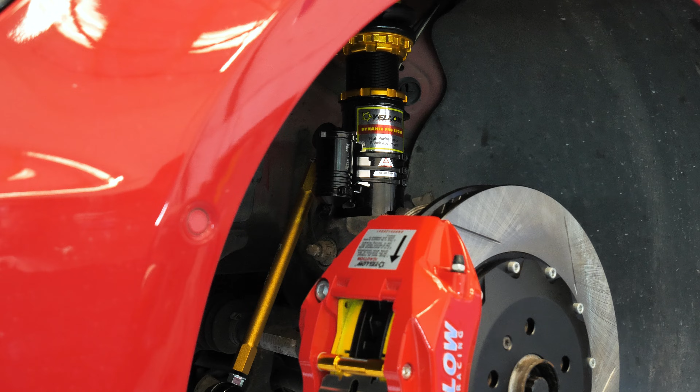Brake kit, RS29s, which we went through in the workshop. We've got the Seat Sport studs, the same studs that we run on the TCR car. Yellow Speed DPS with the Yellow Speed drop links. We've got some KW damper deletes because this car had electronic dampers. You have to fit these, otherwise the traction doesn't work. So they're just to fool the car into thinking that it's still got them on, so the traction control still works.

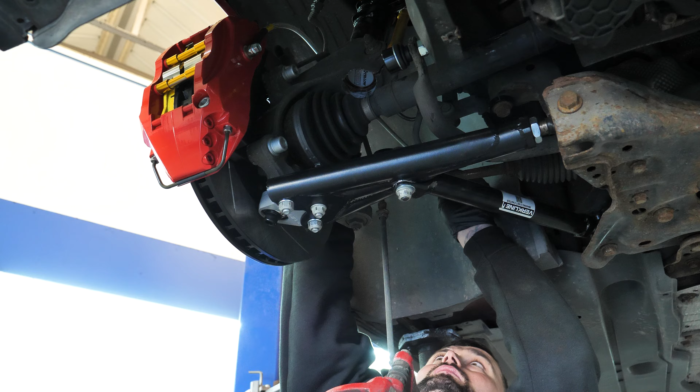Underneath, we've got the RacingLine arms. So set relatively the same as the standard lower arm. Difference in roll centre because this is thicker, which is much better for a lowered car. Otherwise your arms are kind of pointing upwards when you lower it already, which is detrimental to the handling. It's not great at all. So big improvement, mainly with the roll centre at the moment because we've got the arms in the standard location.

Aside from that, we've got the HEL braided lines on. We have got a dog bone insert from Area Motorsport, which just ensures the engine mounts don't try and make a bid for freedom on track. And then we've increased the idle RPM just to get rid of the vibration at idle, so it feels like a stock car still on the road, no vibration or horrible noises from that. Moving on to the rear, I think that's everything on the front.

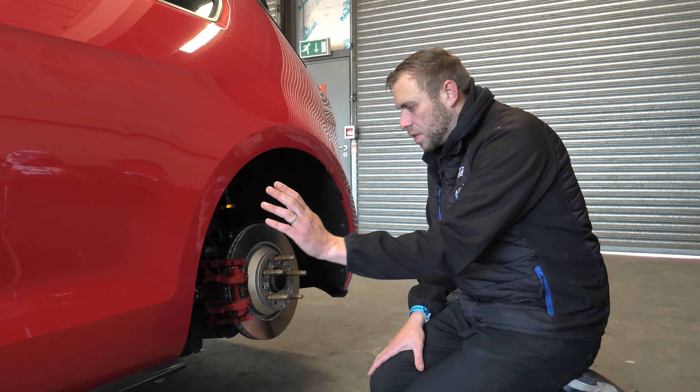Rear, we've got obviously brake pads, the EBC Orange that we spoke about before, the Hardrace camber arms, damper deletes again have to go on the rear to fool the traction into not thinking it's got a problem like a faulty damper or something along those lines. We've got the Powerflex inner and outer bushes on the hub and on the inner spring arm. And then we've got some Hardrace bushes on the trailing arm, which again we didn't go through in the workshop, but there's a lot of flex in those. They're a large bush, very soft, lots of movement under compression and load, so we've changed those to ensure there's no abnormal movement which will change the geometry on the track.

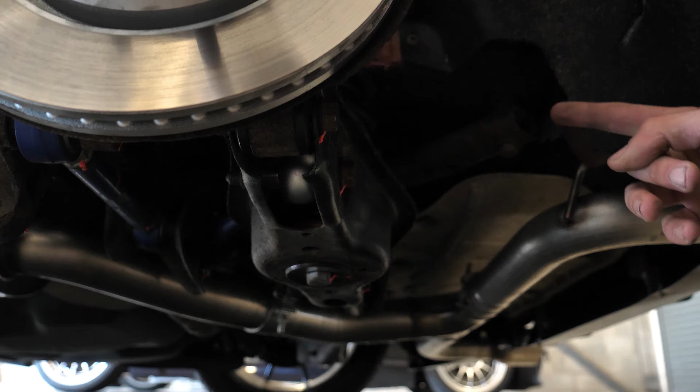If you come around the back, you can probably see again something we didn't have at the workshop, I don't think. It's quite difficult to see, but we've got the Hardrace rear anti-roll bar on there, and then the Whiteline adjustable drop links. So we dropped that on the scales at the workshop. Obviously roll bar's disconnected. Check the corner weights. It's pretty good straight out of the box with the platform heights level. Car weighed, it's got full interior apart from the seats, and weighed about 1340 kg with a full tank of fuel. Our race cars are about 1250, so it's not too bad considering it's an unmolested car that's just got some bucket seats changed and that's it.

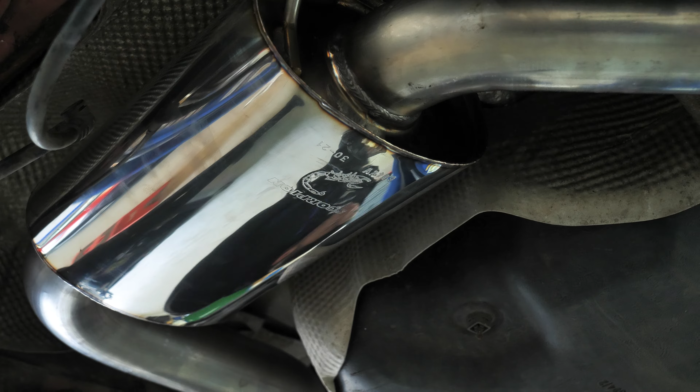A few other things, we've got the Scorpion exhaust on now. Again, resonated system, perfect for 98 decibel track days like today. So no issues with noise at all. And then we've done a few aesthetic things. We've got a Rieger diffuser, Clubsport spoiler. We've got the SRS Tec front bumper scoops and a TRC front lip, but they're really just cosmetic. They're not going to do anything for performance at all. I'll show you through the inside quickly.

Interior, we've got a retrimmed steering wheel from Custom Controls, identical to a Clubsport wheel. Gives you a bit more grip on track, especially with your gloves on, so it's a much nicer feel. We've got the Cobra Nogaro bucket seats. They've done the red stitching on them, this car had leather, so it matches all the red stitching that you've got on your door cards and stuff, so they're really nice. And then we've got a Race Logic lap timer in the centre, which will just give us some data.

It's the same we use in the race cars, so we can almost compare this car to the race cars, see where the differences are. We know what the differences are with the chassis and the brakes and the power and stuff, but we can actually see it data-wise and see what the differences are between the two.

Aside from that, I think that's about everything we've done. Obviously, you've seen all the parts laid out. We'll get out on track shortly on the PS4s to start with. We do have the AO52s, again, these are what we run on the race cars, so we're going to be comparing same tyre to the race car. It's not going to be any different at all.

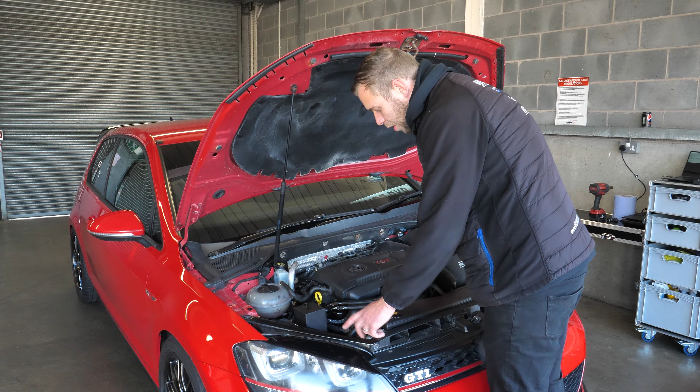Under the bonnet, we've got relatively stock still. We've got the HPA intake pipe that they provided, and just a ram air intake, which is one we had lying around, just gives a bit more noise. We have got the very important catch can kit, which stops plumes of smoke coming out

the exhaust from surge. So this is the plate that replaces the PCV valve, and it basically breathes back into there instead. So pretty essential to have that on track. I've seen plenty of people without them get black flagged, so quite important.

Aside from that, it's all stock under here at the moment, which is what we want to do. Obviously, it's got the TI Motorsport Stage 1 map on it, 290-ish horsepower, I think it's 290, 300 on the dyno. So yeah, we'll see how it goes.

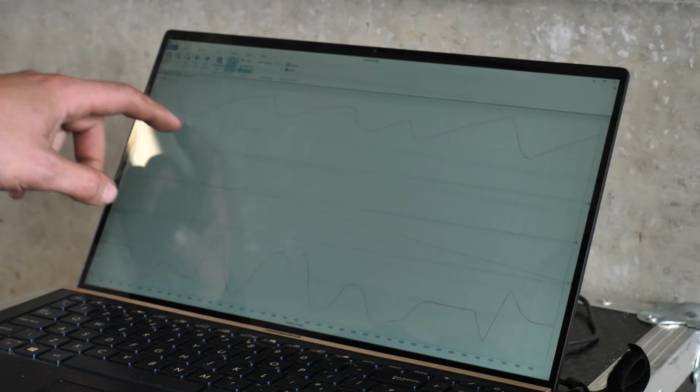The car generally drives the same throughout the lap, so this is like turn 1, Craners, old hairpin, so on, and you can just see the G that you can carry on the AO52s is more than the Michelins, which is what we expect to see. Doesn't take away from it driving well on the Michelins, it's just more grip, quick around the corners, and that's it really.

Next video, we'll be putting on all the parts that HPA have sent us, so really excited about that. We've got their turbo, intercooler, we'll probably get another set of tyres because these are about dead now, the semi-slicks. They were pretty dead when we put them on at the start of the day, so they're worse now. So yeah, we're going to come back here, same track, data logger in again,

see what we can do with the HPA parts on, see how they perform on track, have a look at the temperatures again. We'll get the logger in there for those, and yeah, quite excited to see what it can do on those, but really pleased with the car today.

You know, we haven't thrown a load of expensive parts on there. In chassis and brakes and stuff, we're probably about £3,000 in, which is, you know, everything. We've done arms, bushes, few spherical joints, roll bars, coilovers, engine mounts. There's a lot of stuff we've done. So for that sort of money, it can't really be beaten. The fact that it drives so well on the road and drives really well on the track as well.

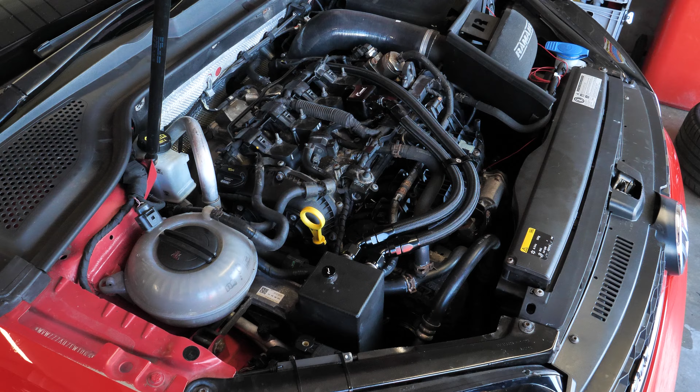Yeah, so like I say, it's a conservative setup. It's a setup for everyone. We can fine-tune the geo for driver preference, which is what we always discuss with customers when we do a setup on a car. But this was a very safe setup. You'll see from the video, there's no movement. It's extremely good down Craner Curves and places like that where cars can be twitchy. So yeah, I was really pleased with it on both sets of tyres, considering setup hasn't changed for either set.

One thing we did notice, which we knew already to be honest, GTIs, the DSG variant, the gearing is extremely long. So top speed we were hitting at Donington yesterday was about 120 down the back straight. But the problem with the gearing on these cars is third gear does about 80 mile an hour, and fourth gear does the best part of 130 mile an hour. Where that really hampers you is corners like Old Hairpin, which is down the bottom of Craner, the right hander. It's right between third and fourth gear.

If you take the corner in fourth, you've got no acceleration out of it at all. It's so low in the rev range. If you take it in third, you have to slow your entry down a bit more to get third gear, so the car will actually change down to it. Then you're slightly slower through the corner than you'd want to be, and it's the same story in a few other places as well. So we address that on our race cars by fitting a DSG box out of another car. We will do that to this eventually as the series goes on. But you'll see from the video it does hamper it a little bit in a few places.

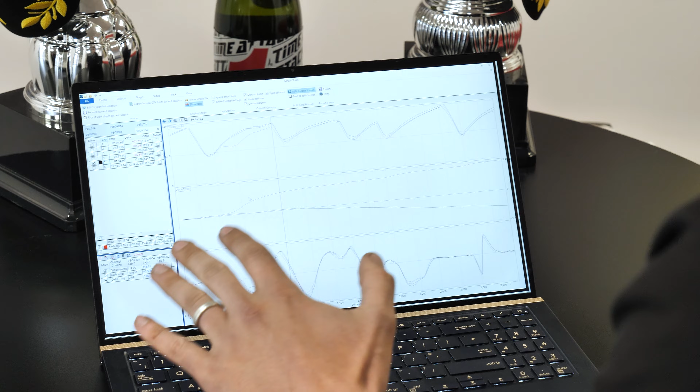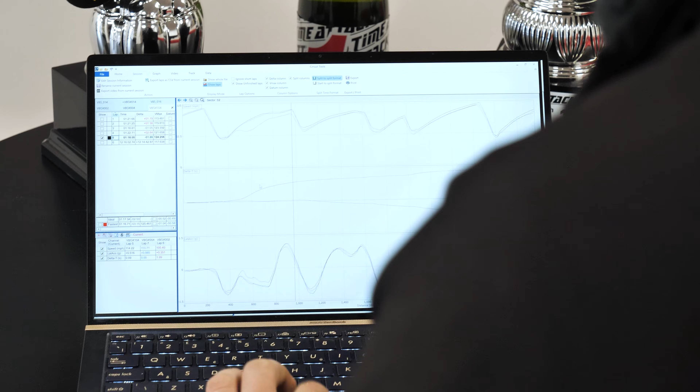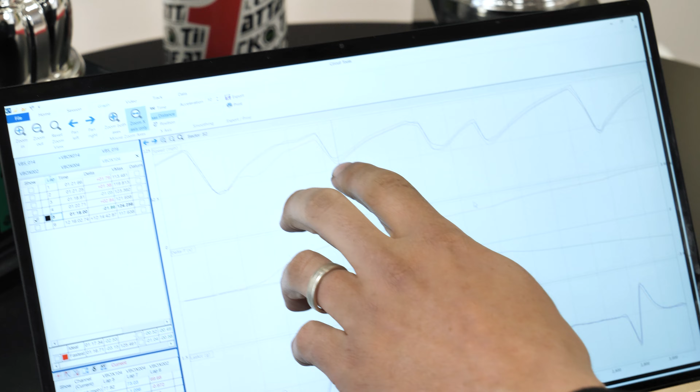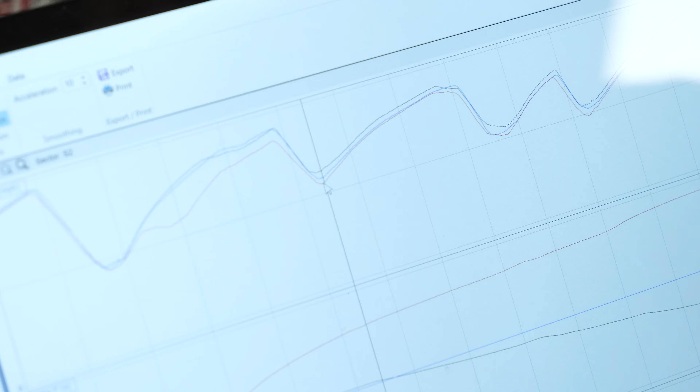Data wise, what we've got here is we've got 3 lots of data. We've got the car on Michelins, we've got the car on A052s, and then we've got one of our race cars which is also on A052s. And the data kind of shows us what we were expecting. If I pick a particular corner like Old Hairpin, which is here, the red speed trace is the car on Michelins, the blue is the car on A052s, and the black is one of our race cars. And you can see what you'd expect really, that corner speeds, race cars the highest, A052s are in the middle, and the Michelins are at the bottom.

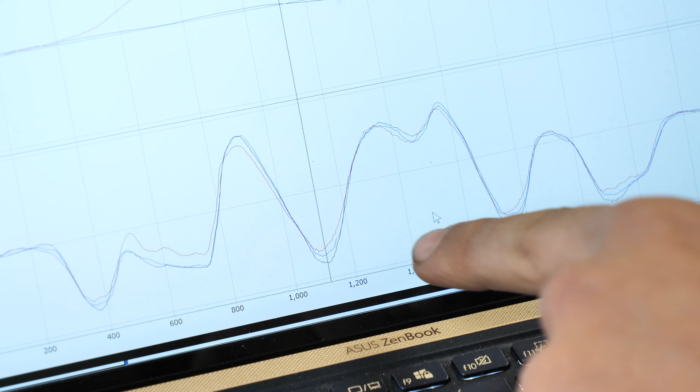If you look down at the lateral G again, you can see the difference that the car can pull lateral G. Again, red Michelins, blue being the A052s, and the black being the race car. Obviously the race cars have A052s, the same tyre, but they're 30mm wider per side. The cars are much lighter. They're on suspension that's fully tuned for racing, so it would be horrendous on the road.

So it's exactly what we expect to see, but the main thing is that the curves through the speed traces all follow. So you lose a little bit on exit, you lose a little bit mid-corner, you lose a little bit on braking, but it's all even across the board. So that was good to see. It's what we expected to see, but it just shows that the car drives well on either tyre without having to mess around with setup and stuff. It's not a problem to go on whichever one you want to.

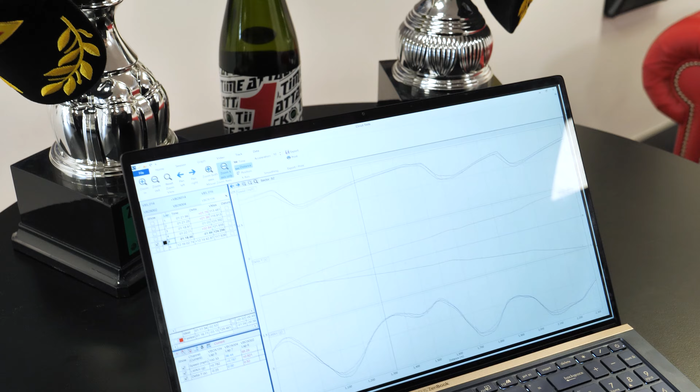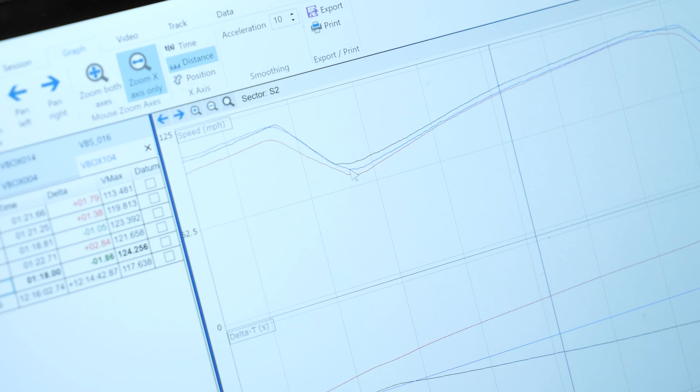It's the same throughout the lap. There's no difference. I mean, we can even just zoom in a little bit to show it. But yeah, this is coming down into, you can take this corner, you can take this corner, they're all the same. Braking wise, relatively even, to be fair, between the road car that we've got outside, the red one, and the race car. Not much difference in braking, but you just can't pick up the power where the race car can to get through the corner, which is what we expect.

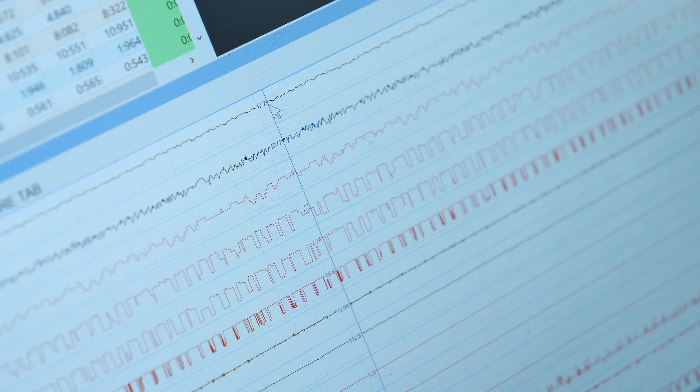So we've got a bit of data. This is one of the runs. You can basically see across the board intake temps, stock intercooler, stable between 44 and 40 degrees. It was about a 14 degree ambient day temperature wise. So stock intercooler at stage 1 power is no issue at all. Its efficiency is perfectly fine. It's not going to slow you down on track at that. I think these cars start to clip ignition at about 55 degrees, so well below that.

Coolant temp, we know is an issue. We got up to about 114, which, we've had a few hot days with the race cars where they've run around at 118, 119. It's really not ideal. Oil cooler will certainly bring that down. We've got a larger DSG cooler that will go on it as well. So DSG temps were at 120, so not overly high, but because the water system cools the oil system, if we decrease the oil temperatures in the gearbox and the engine, it'll automatically bring down the coolant temperatures as well.

So pretty much what we expected to see, but we know stage 1 power, your 300 brake, is no issue with the stock intercooler at all. If it was a hotter day, it might get close to what you'd class as a limit, but in general, it's perfectly fine for doing 20-minute sessions. The oil temp was a real issue more than anything else.